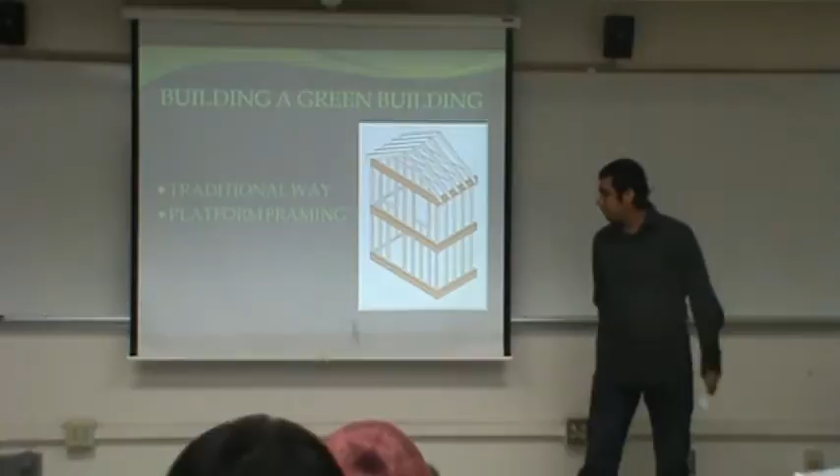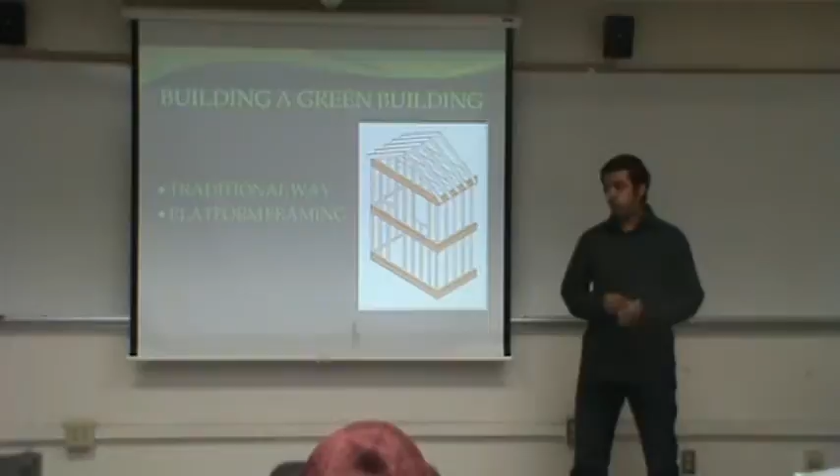There are 2 primary methods. The first is the traditional way, the wood light framing construction system. From the book Fundamentals of Building Construction: Materials and Methods, author Edward Allen says that the most universal process is the platform method, where you first make a platform, then erect walls, then put another platform, erect walls, and so on until you get to the attic and roof.

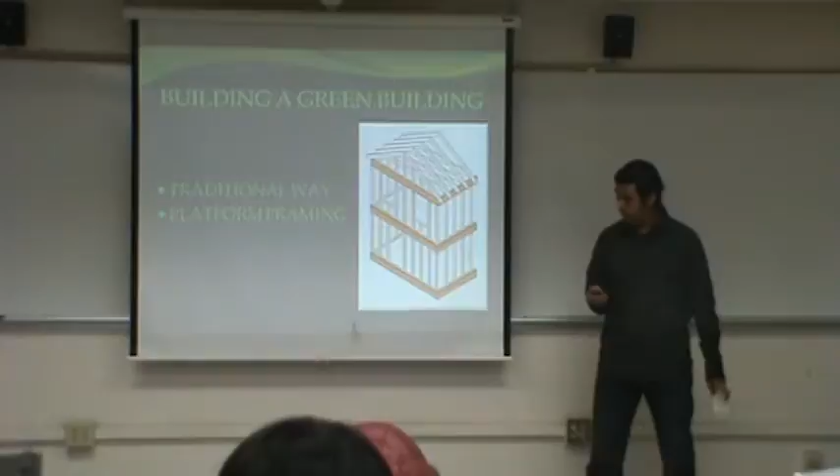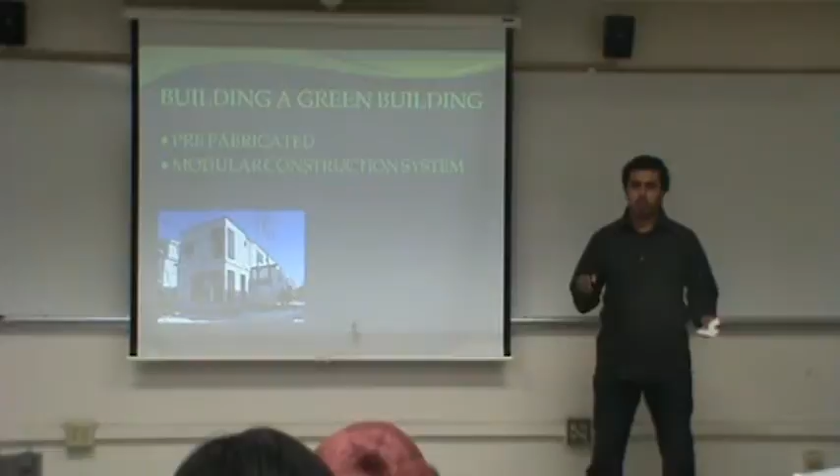Another way to build these green buildings is by prefabrication. One way is built the same as the traditional method, but off site, and then the walls come and are put back on site. Another way is an assembly line, where they just make the walls, take them back to the site, and put them together. The walls are numbered, and they give you a plan to follow.

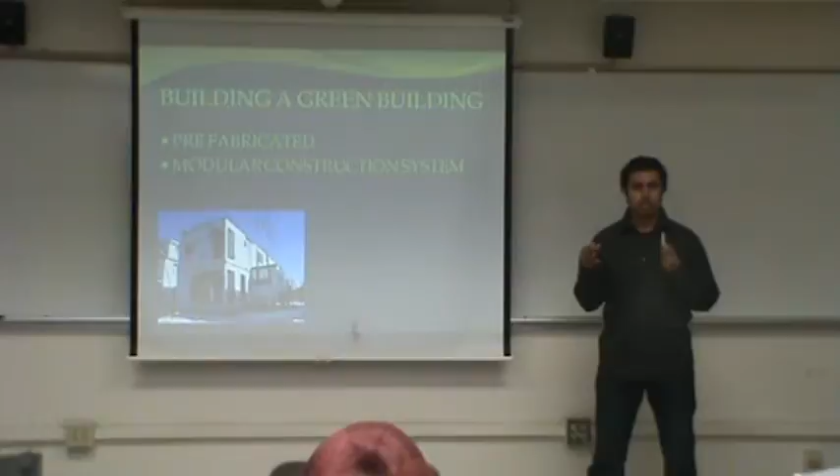Another method is modular construction, which is also built off site but in box-like modules. Here you see a home built in 3 modules: the bottom, the top, and the side one. After being built, they could actually be assembled like this.

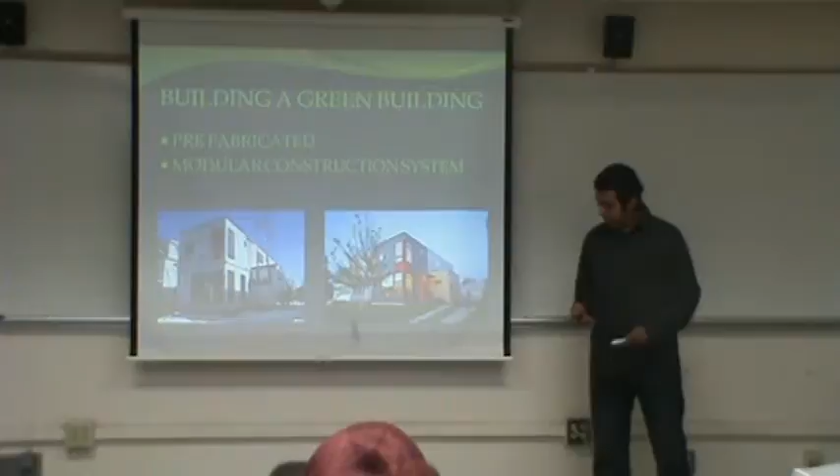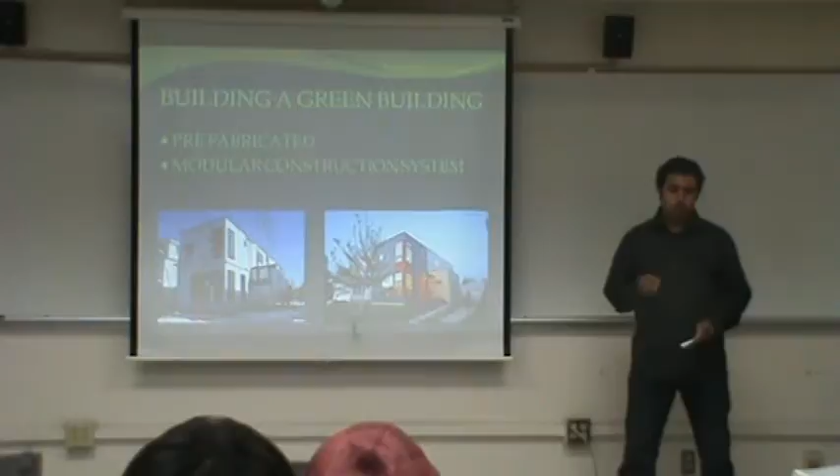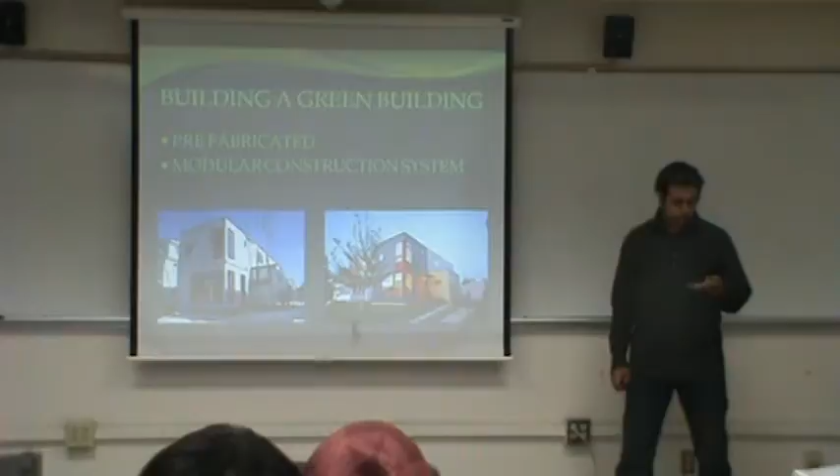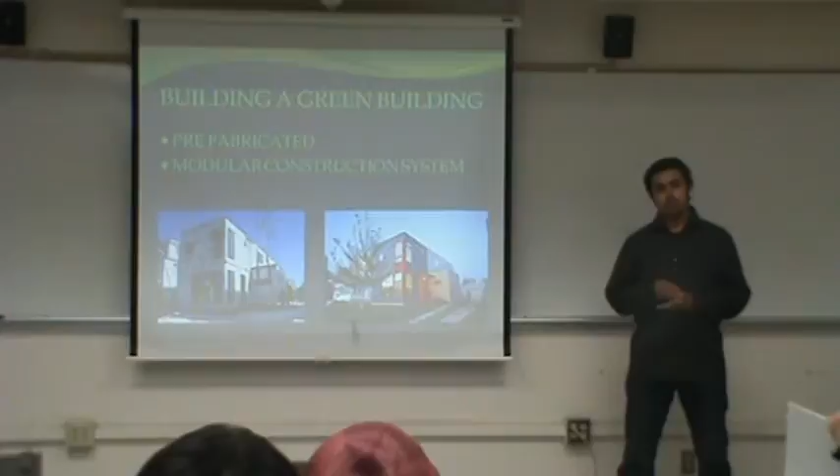Now that we know some of the ways these things are built, I'm going to talk about some of the materials. Some materials that could be considered green are rapidly renewable plant materials, such as bamboo. The book Green Facilities Handbook: Simple and Profitable Strategies, by author Woodroof, says that bamboo is a green material because it grows rapidly and is sustainable, growing faster than the ordinary wood or hardwood we use on these buildings.

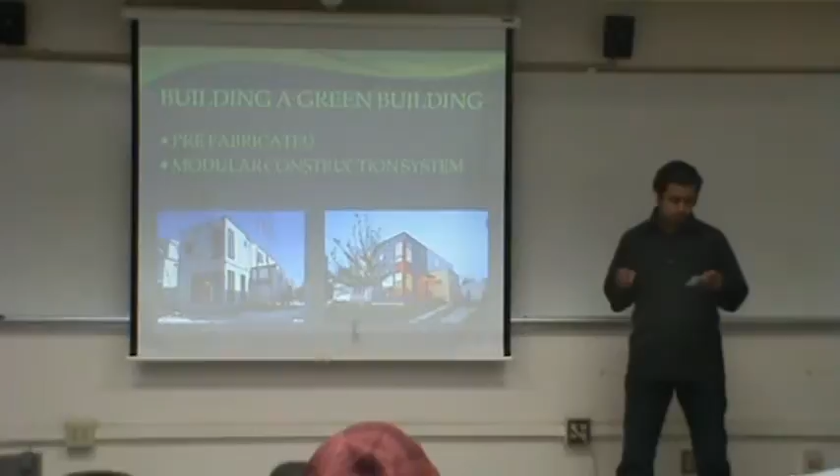Another plant material is ordinary lumber grown in sustainable forests. An example is corkwood, which can be used for flooring, doors, and cabinets. Corkwood comes from the bark of the tree, so you're not cutting down the tree, just using the bark, then letting it regrow and reusing it when it grows back.

You also could get recycled materials like stone, metal, and other non-toxic and reusable materials. The book Your Eco-Friendly Home: Buying, Building, and Remodeling Green, by author Davis, says that recycling began long ago on the American frontier, where settlers would burn down their cabins and take the nails, then reuse them in the new house they would build.

The EPA also suggests using industrial goods like coal combustion products and demolition debris. An example is fly ash, which comes from coal-fired power plants; it's mixed into concrete, which actually makes the concrete a little bit stronger. You also have denim insulation, which comes from recycled denim, like jeans from blue jean factories.

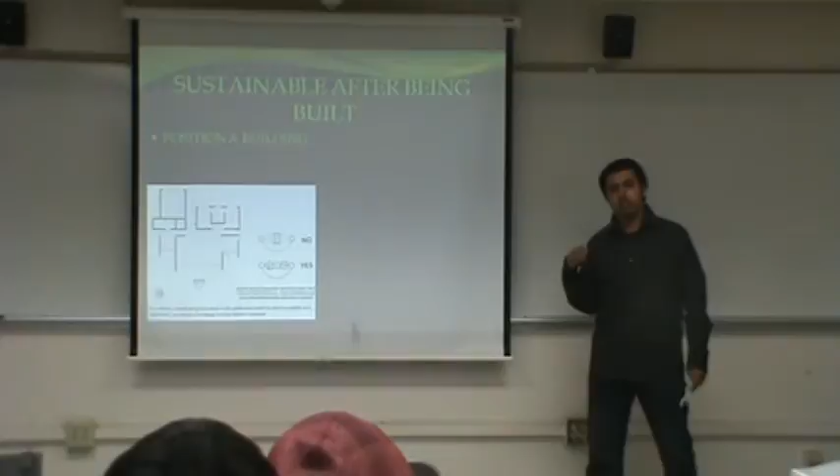Sustainability may involve energy efficiency, achieved by positioning your house the right way, with most of the glass on the south side of the building, since we're in the northern hemisphere and the sun is in the southern sky. You also want to orient your house from west to east.

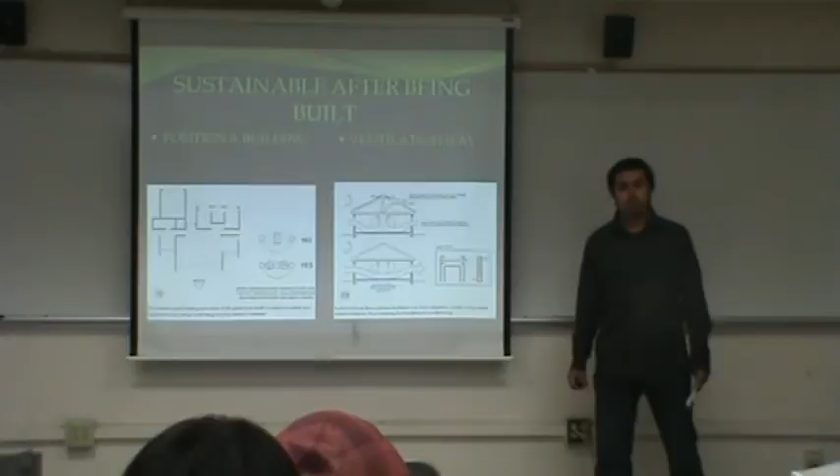Another way to be sustainable is to have good ventilation, making the house like a fan so wind can pass through. This can reduce your energy bill and reduce your use of air conditioning. There are also solar panels, which convert sunlight directly into energy and are made of semiconductor materials like silicon.

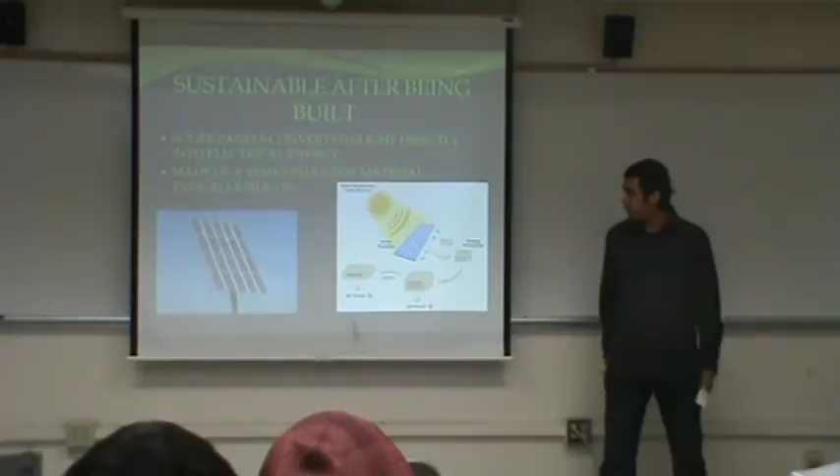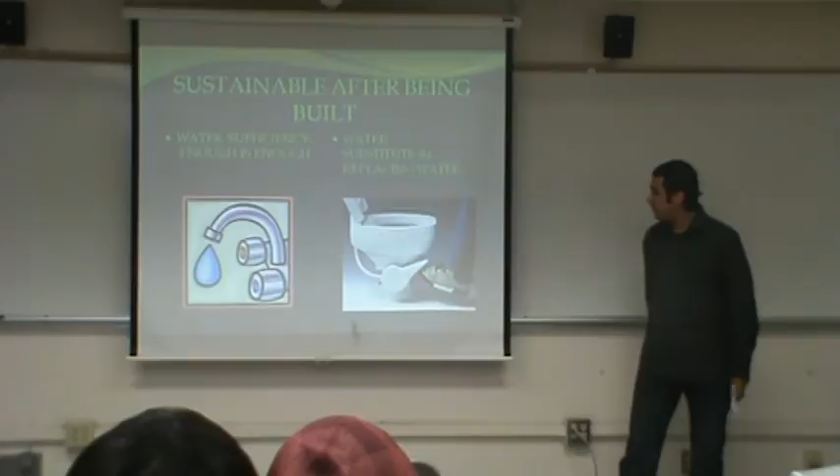Another way to be efficient is with water, to waste less. Water conservation means doing less with less, such as using less water on your lawn. Water efficiency means doing more with less, like having toilets and faucets that use less water, and fixing leaks. Water sufficiency means enough is enough, like making sure you turn off the tap while brushing your teeth. Water substitution means replacing water, like air—this is actually a vacuum toilet.

According to Davis, working with natural materials, energy conservation, and recycling are becoming mainstream, and some are even mandatory in certain areas. Home buyers are starting to demand green building products.

In conclusion, I have shown you the ways green buildings are built, some of the materials that are used, and how they're sustainable after being built. Thank you for your time.